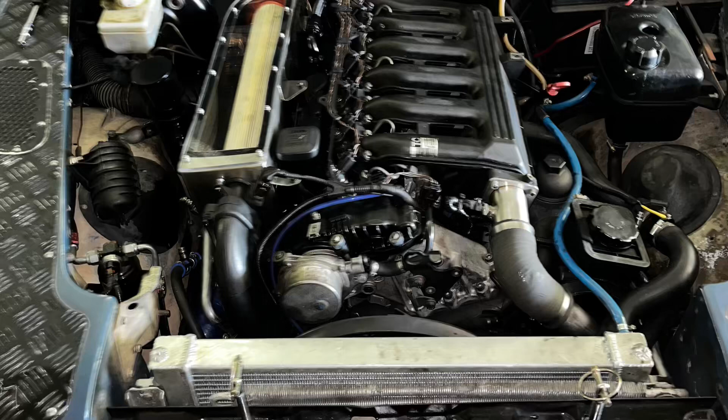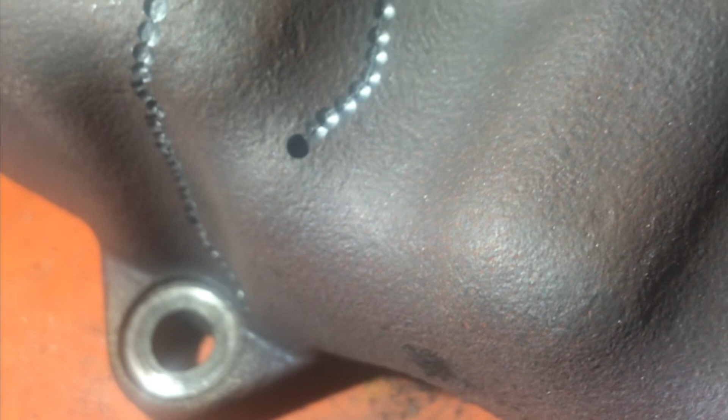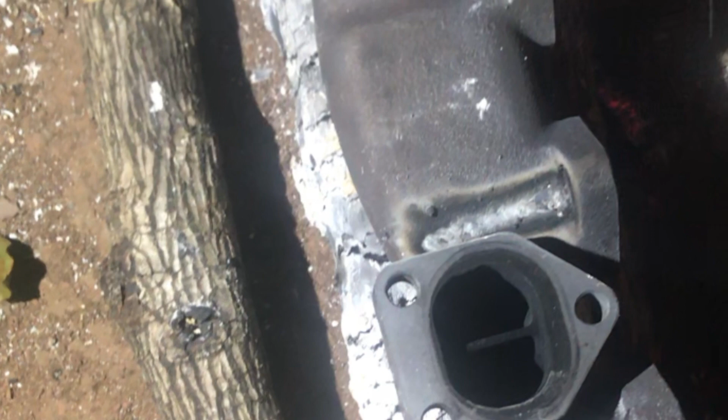We had to weld it up because we found that cracked. Also had injector faults, so we went through that process. I've made a couple of random videos and just chucked them all together because I've been recording footage.

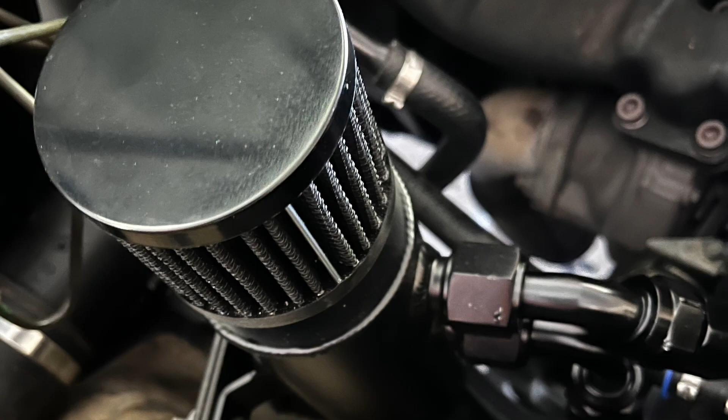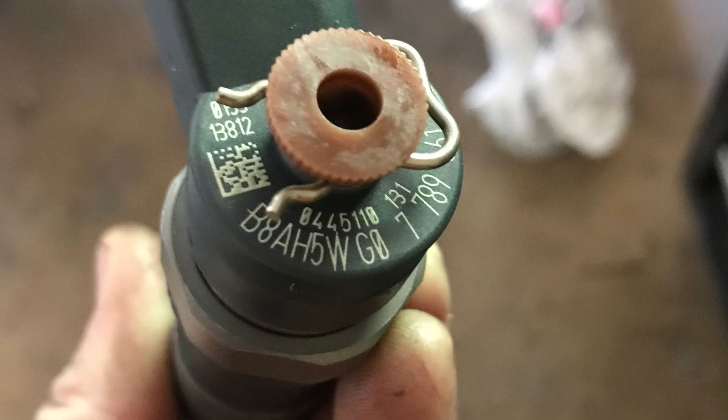So we made an oil catch can - well, I didn't make it, but we made the brackets and everything, and the plate to go on top of the engine. So yeah, we'll see how we go. Just do a couple of part videos and see how it turns out. Hopefully it makes sense.

Had a couple of issues. I've had the Land Rover on the road for a bit. It's been running all right-ish, but I noticed on a cold start sometimes there's a little bit of smoke and a tiny misfire. Suspecting one of the injectors has gone down on it.

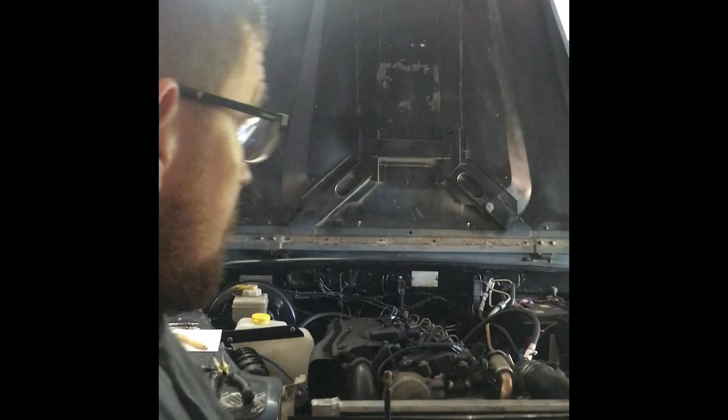So I've been driving around. It goes really well, the Land Rover M57. Been driving it for a couple of weeks, goes well. So anyway, thinking I've got an injector fault because there's kind of white smoke coming out.

So first things first, gonna do a compression test on it, just in case the injectors are overcompensating for a low compression cylinder. That's what I'm going for first, without wasting any time.

Halfway through it, well, nearly all the way through it. We've got about 330 on cylinder 1, 340 on cylinder 2, 333, 340 on number 4. First time round on number 4 it came up 200.

That made me a bit nervous, but then I did it again, and I think it was the seal on top of the compression tester here.

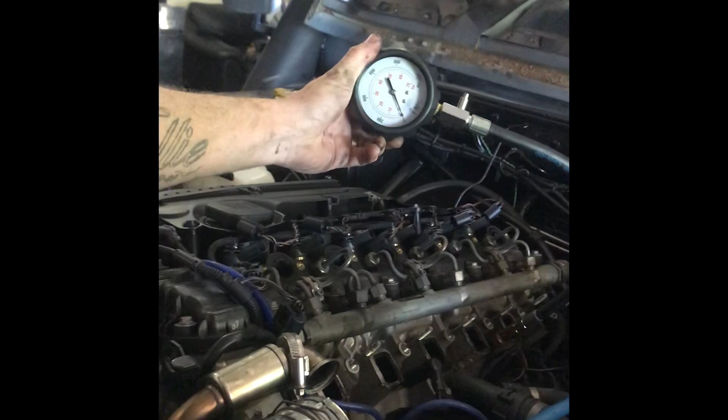Cylinder 5 is at 380, so a little bit higher than the rest. Suspecting it may have diesel down in the cylinder, just giving it high compression. Hopefully it's not going to lock up.

But that was my main worry anyway, with the injectors leaking into the cylinder. You can hydro lock, and if it dumps all the fuel in at once, if it finally lets go, you can bend a rod then, which we don't want.

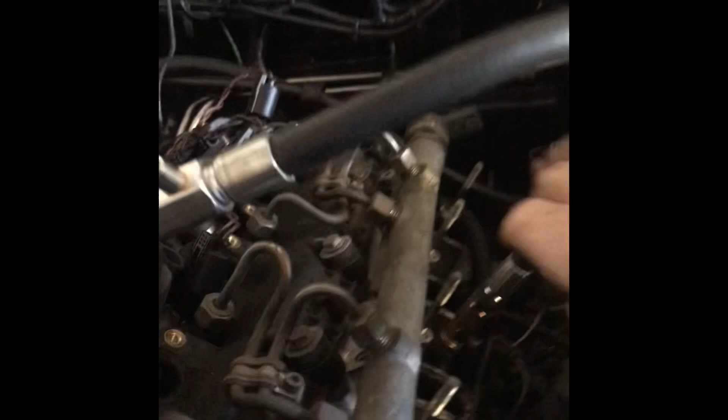Yeah, basically got this so far. Let's do number 6.

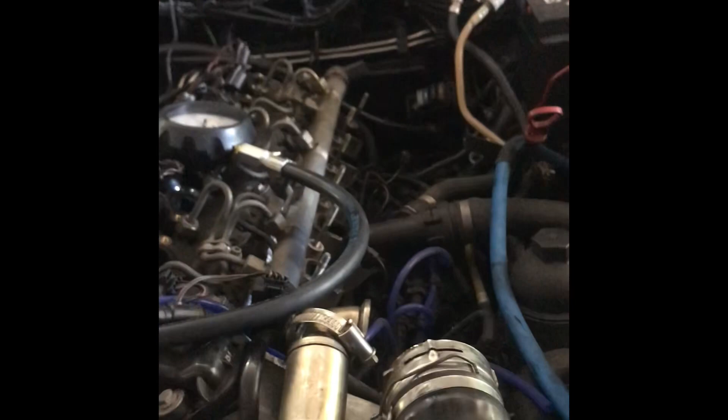Basically got a little adapter that goes into your glow plugs. Glow plugs are pretty stiff coming out, so the best thing to do is run it around the block a couple of times to get it up to running temp.

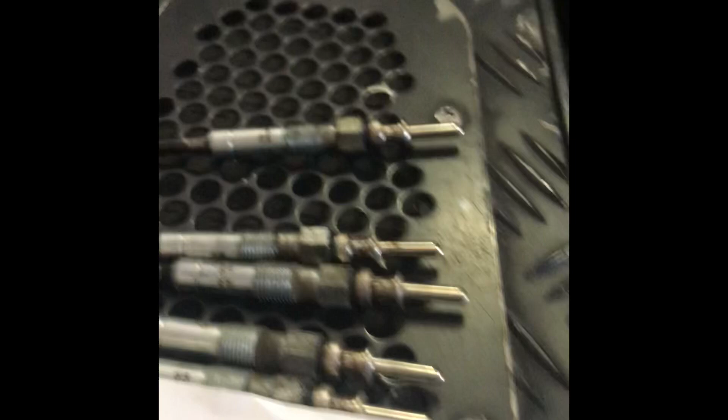The engine's hot. When it's up to running temp, I just got one of these compression testers - I've had this one for years. It's awesome, all the different fittings, different threads, but find the one most like the same seat as your glow plugs.

Make sure you catch it properly first. Don't advise using these, but I don't tighten it, I just screw it in. Just get a little ratchet and nip it up - literally nip it up, don't over tighten them.

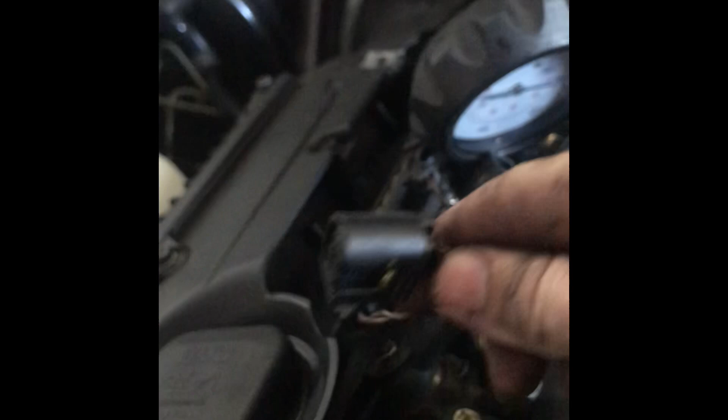And we pop on our gauge. Sorry about this terrible camera work. Pop the gauge on, rest it up there for a minute. I've disconnected all the injectors before we do it, because we don't want it starting up while we're doing a compression test.

We're just going to spin it over a couple of revolutions. I think I've been using 7 revolutions for this test - you can hear it. What are we on? That's almost on 400, that's high as well.

So number 5 and 6 are higher. So 4 - it's quite a difference. Quite a difference between cylinder 1 and cylinder 6. It's not a massive difference.

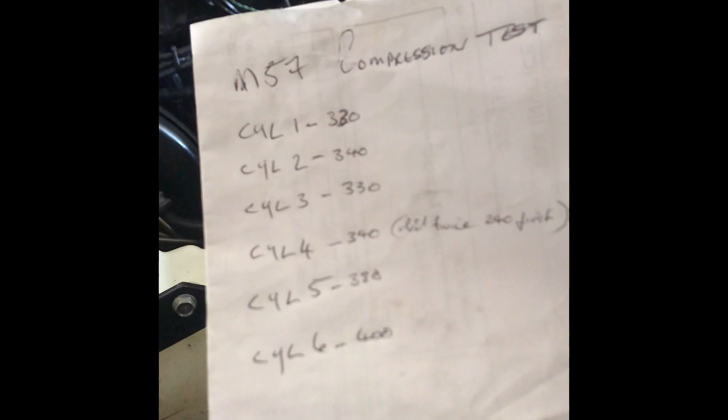They're all pretty healthy, but the two, cylinder 5 and 6, I reckon that may be our injector problem there. Like I say, it's only 40 psi between 4 and 5.

It's not massive. I've done a leak back test as well. I'll try and get the results of that.

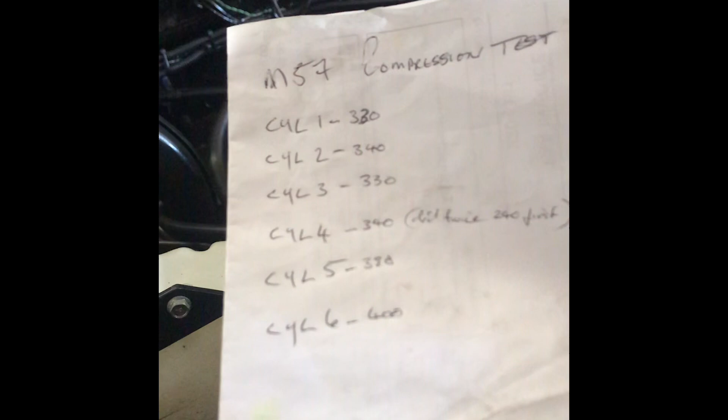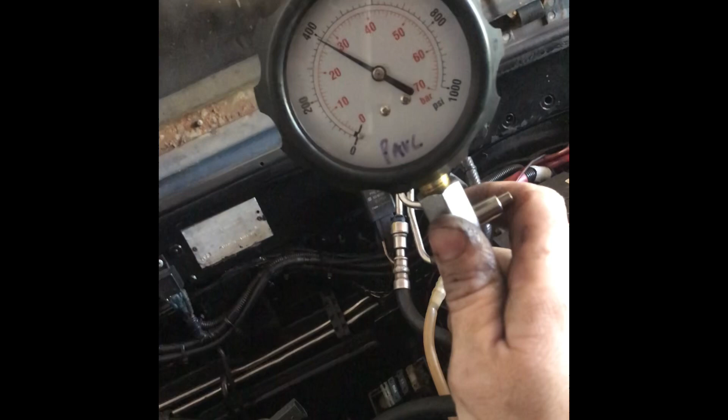Yeah, what are we looking at? Cylinder 6, 330, so 70 psi - it's quite a step up. It could be leaking back, but it's not exactly 400. It may be... that's like 390.

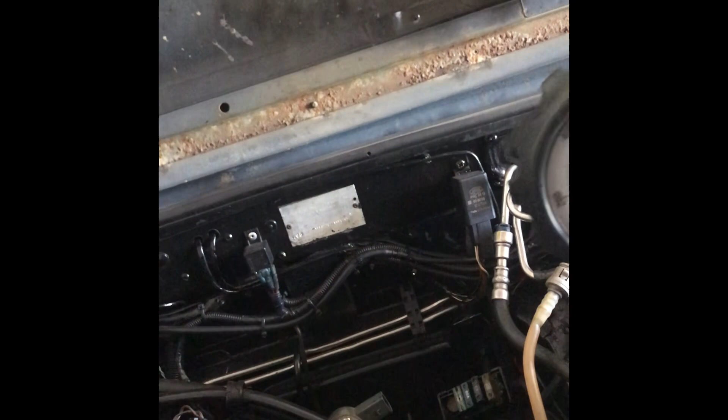Anyway, they're not miles apart, still got good compression. I was looking for something more like big steps, like 50 psi in a cylinder or something like that. I didn't think it would be, because the engine pulls hard.

There's no big misfire, but there was a little misfire at cold start. I've also got a lot of oil in the manifold, thinking the turbo may be on its way. Got to investigate that as well. That could be something to do with my issue.

But I'm definitely thinking injectors are on their way, so I'll let you know the results later on.

So I did all the compressions all again. I had to do them all again, I was doing my head in. So I've done them all again. We got 380, 380, 380. Cylinder 4 is 360, that's our lowest.

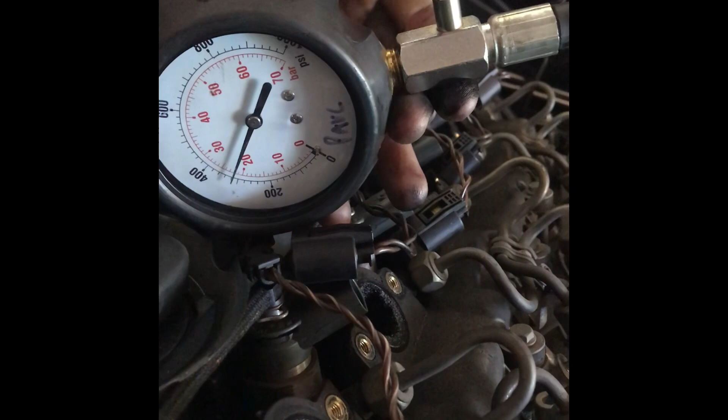It says did twice, 240 first, it says on there. There's a problem, the switch on the gauge. See that there? See it leaking? So that's what was happening. I was coming back round to it, and then the gauge was dropping like that because of this little switch.

So just be careful of them. I haven't used this for a while, but that was my problem, it was giving me dodgy readings. So yeah, that's why it was 240. I was checking it and it just stopped leaking.

So I've done all the tests again. We got 380, 380, 380, 360 for cylinder 4 now, cylinder 5 380, and cylinder 6 400.

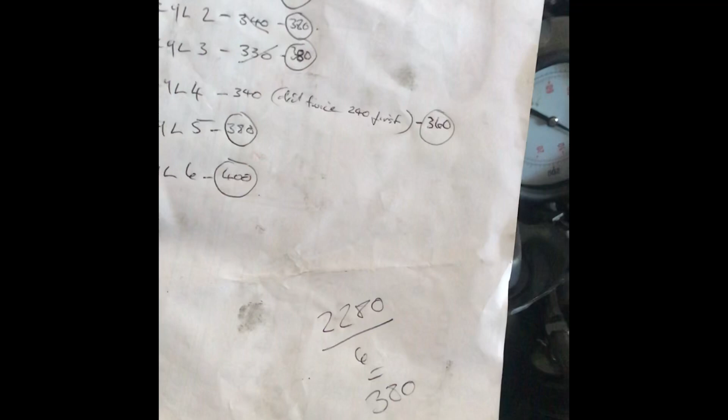And then you just work out an average of all the cylinders, and then work out 10%, because you should have no more than 10% between cylinders. This one's a tiny bit over 10%, by 2 psi, which I reckon if I'd done a reading again I could probably get it up to that, so I'm not worried about that. That's pretty good, all good readings for an engine with this amount of Ks on it.

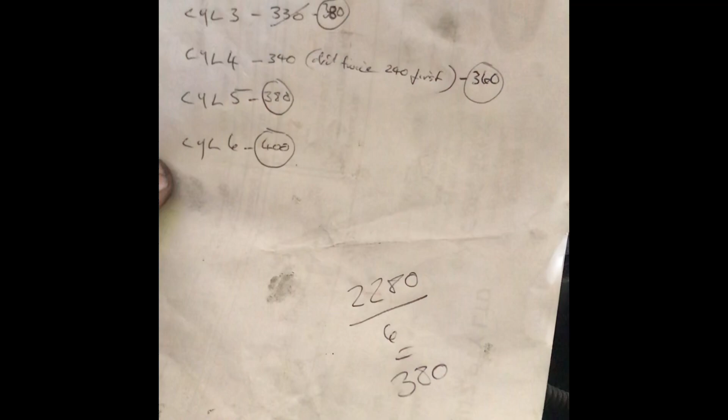So 10% was 38, and between 360 and 400 - I think it was just under 400 anyway, but I just said 400. So we're all within specs for our compression. So the engine's good, the engine's healthy. I can just concentrate on that smoking issue, which I suspect is the injectors.

Like I said, I'll take them all out and send them away, and then look into this turbo issue. If it ends up being a turbo which is leaking, looks like we're gonna have to get an upgraded turbo. Yeah, we'll get an upgraded turbo I think, get something a bit bigger and better for something that's tuned like this anyway. I don't know what's about on the market, I haven't really looked yet, so I'm gonna have a look around and see what's for sale. But yeah, we'll get back to you and let you know the results.

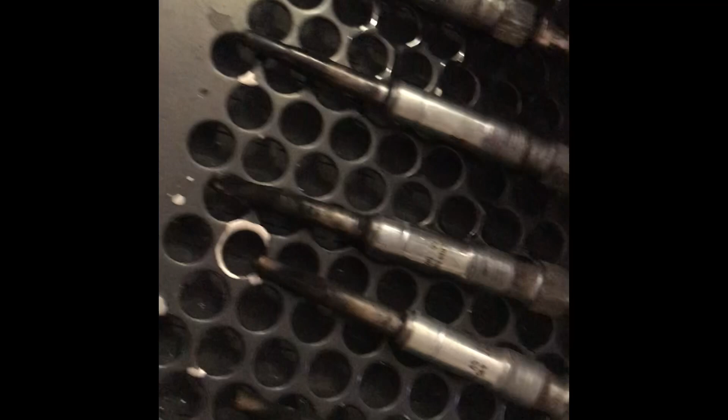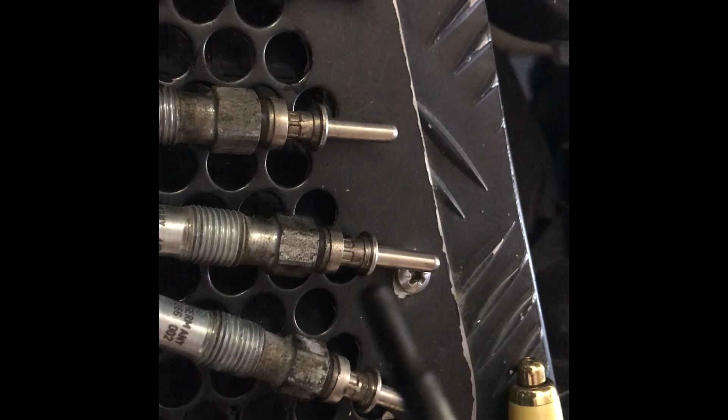Another little telltale which I forgot to mention earlier: as you pull the glow plugs out, just keep an eye on which cylinder they came from. I've noticed that one - these are going to be replaced anyway. You can see the tips of them, they got carbon on them, but they look like they're almost breaking up in some places. They've distorted, and you don't want these dropping off into any cylinders anyway.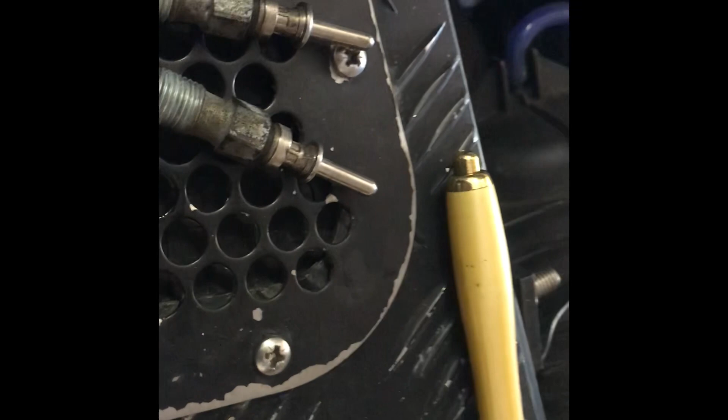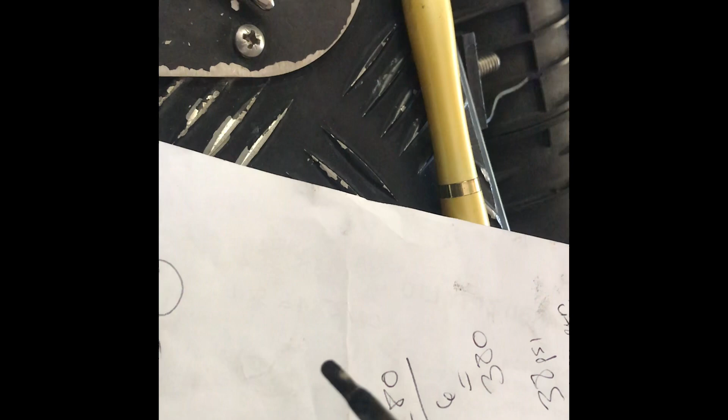But the point I was making is this one's dry, number one. Number two, this one's also dry. See the little... I can't really see it in the video here, can't really see the shape of them, but they're kind of bent, which isn't good. Like I said, you don't want them breaking off. Number three, nice and dry again, same sort of thing - see the shape on it? It's like twisted.

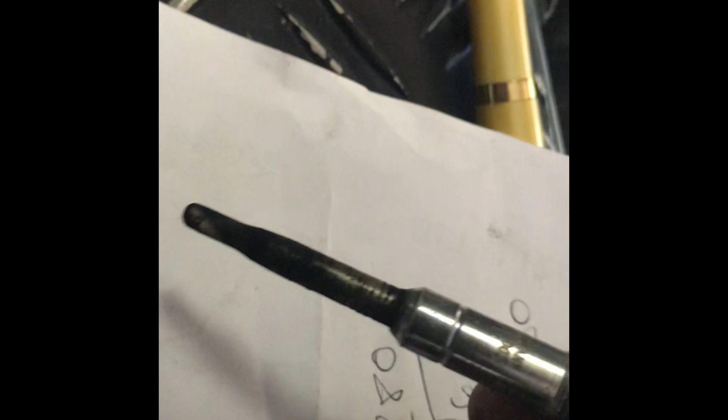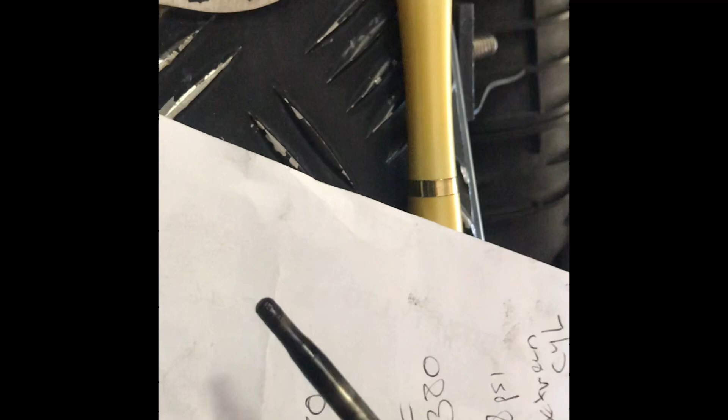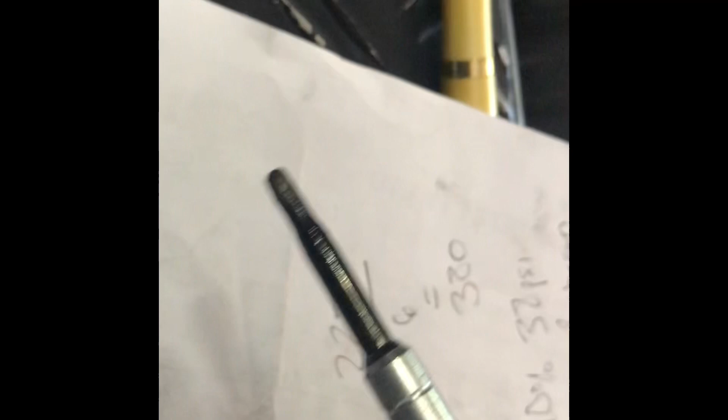Number four, that's also dry. Number five, I've wiped a bit off this, but that's wet. So that could be a telltale of a leaking injector. It could be anything, but more than likely diesel on it, looks like diesel. And number six is the same, see it's a bit wet, and all the carbon bits on it.

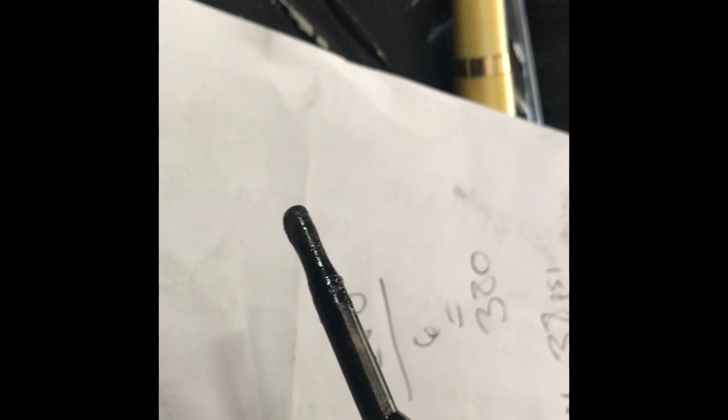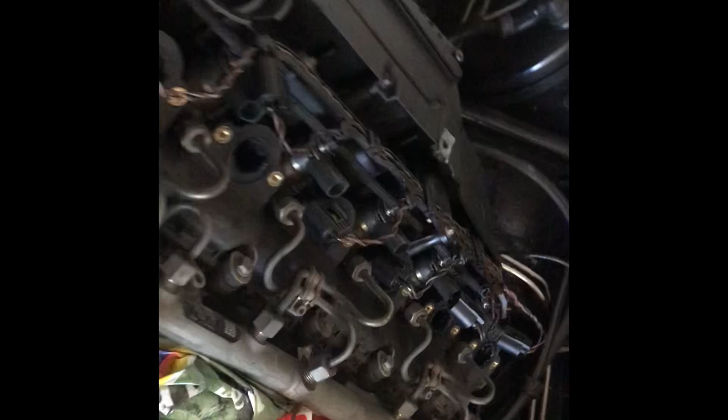So yeah, could also be oil. Like I said, I got oil in the intake, so it could be oil, but it doesn't appear to be. But yeah, that's another little check you can do.

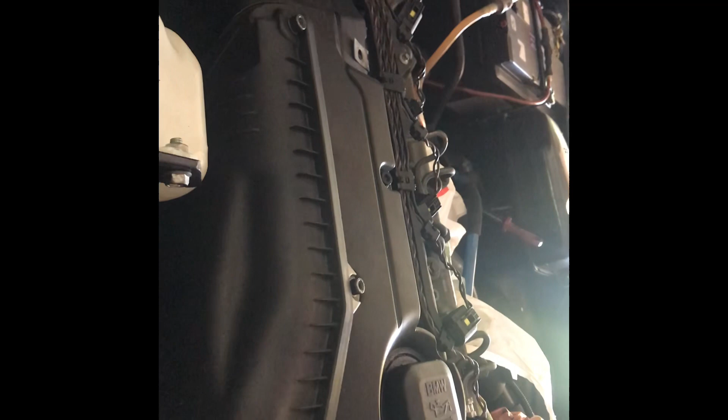I'll also do the same when I pull the injectors out. As I pull the injectors out, I'll lay them all out 1 to 6, all in order, and you may see the tips on them - some of them may be pissing out, some of them may not. So if there's a pool of diesel in it, that could be another telltale.